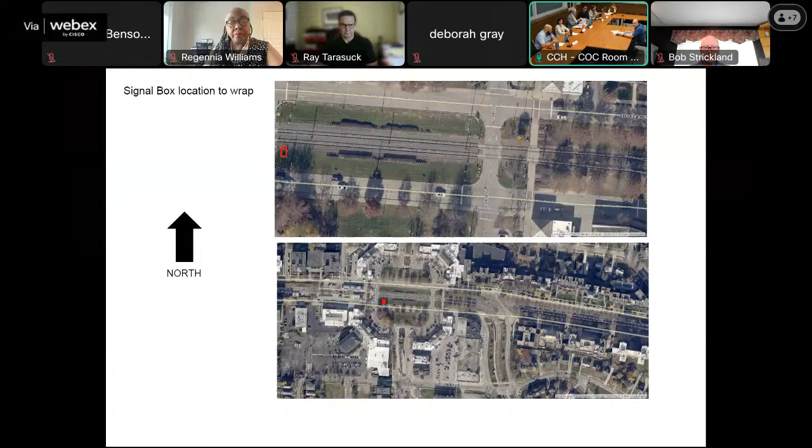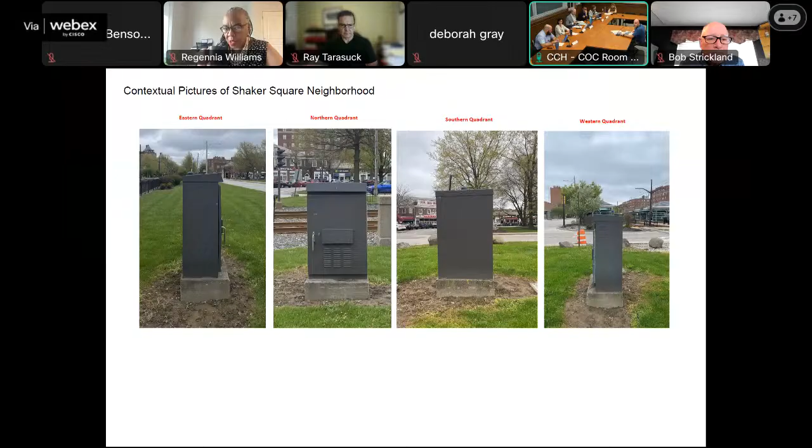And how it currently looks and the design that is being proposed. This is called A Night at the Fair by Renee Parker Boyle.

This project was reviewed by the Greater Cuyahoga Valley Historic Design Review Advisory Committee on July 1st. The committee was excited to see another wrapped signal box. They've seen a few so far, and they were supportive of the project and recommended approval.

Our staff recommendation report is essentially just going to be an email from the Public Art Coordinator, Tara Petrus, who was unable to join us this morning. She says, with vinyl wrapping being an effective graffiti deterrent for utility boxes, I support this project as a low impact way to add some additional visual interest to the existing infrastructure at Shaker Square, complementing the existing box they wrapped on another quadrant last year. With the box being owned by the city, we did get written permission from Commissioner Mavick on June 25th to wrap this box. It was approved by the Greater Cuyahoga Valley Historic Design Review Advisory Committee on July 1st.

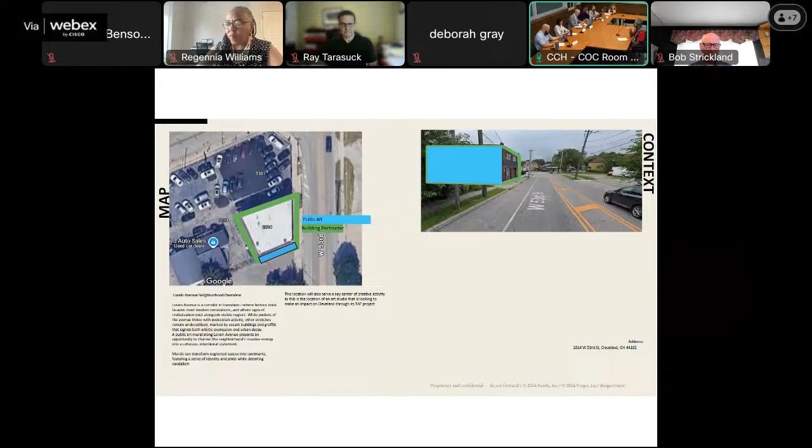Let's move forward. The building is a nondescript warehouse on Lorain and 53rd Street and has no architectural details of note, but does have, through the years of repair, an interesting graphic detail through the black striping and black doors, black windows. And the mural that we're proposing takes that into account, extending that black detail and doing a flat black background onto the side of the building with the crystal dove being the reflective element that contrasts heavily from the flat background.

And the imagery we were representing, we did a crystal heart and what happens when that breaks out of its cage and becomes the dove. So it's really a cool way of showing that freedom starts at the heart. And it went through the historic review, and we're just here to make sure that it's all good. I don't know, there's much more to say.

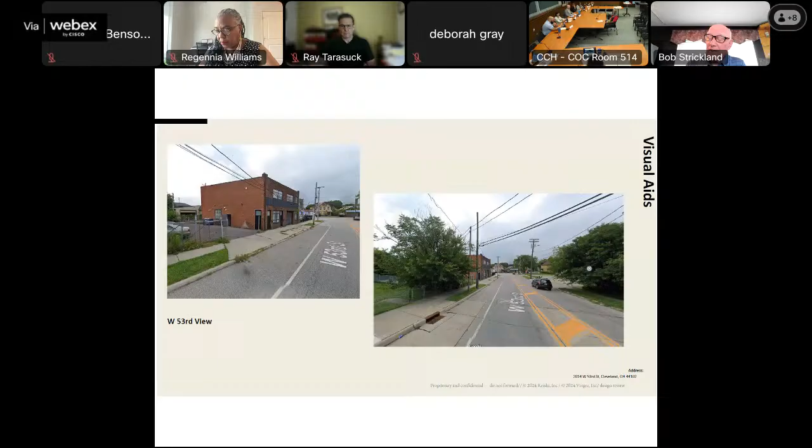Mr. Strickland? Thank you, Madam Chair. I think what my comment was going to be is that typically we do ask that kind of a masonry frame be retained around the mural. But in this particular case, bringing the dark background, the black background, all the way to the corners and up to the coping is very appropriate and unusual. There's no significant major masonry features on this building, so I think bringing it all the way to the corners and to the coping is most appropriate, and I can't wait to see it go up.

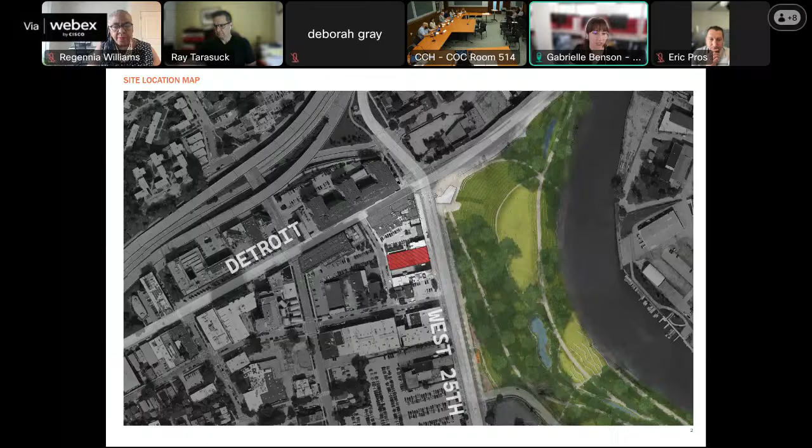We'll be reviewing the Flannery Georgalis offices in Ohio City. Next slide please. We'll go through these slides rather quickly just to jog everyone's memory. So we have the site here on West 25th Street and West 26th.

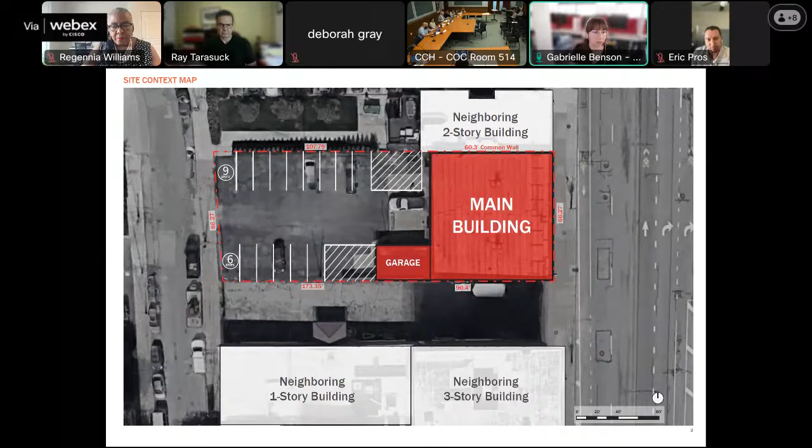The main building is next to a neighboring two-story building and has some parking in the back. The client is expecting a lot of their clients to be approaching from that parking area. Here are some existing conditions that we further investigated after comments from last week. Next slide please. And a historic image just to remind everyone what it looked like in the past.

Next slide please. So here we get into some of the updates that we have made since the last meeting we attended. There was a comment about the treatment of the masonry on the south facade of the building.

Instead of a painted finish, we are simply leaving the masonry, or rather we are repairing the masonry. As you can see in the existing facade, there's some damage to the masonry, especially towards the front of the building, and some parging towards the back. We're planning on repairing the masonry that needs to be repaired and then covering that with a layer of parging that matches the existing stone details on the facade.

Next slide please. So here we have an updated elevation with some of the changes we were able to make since the last meeting, and we'll get into those details right now.

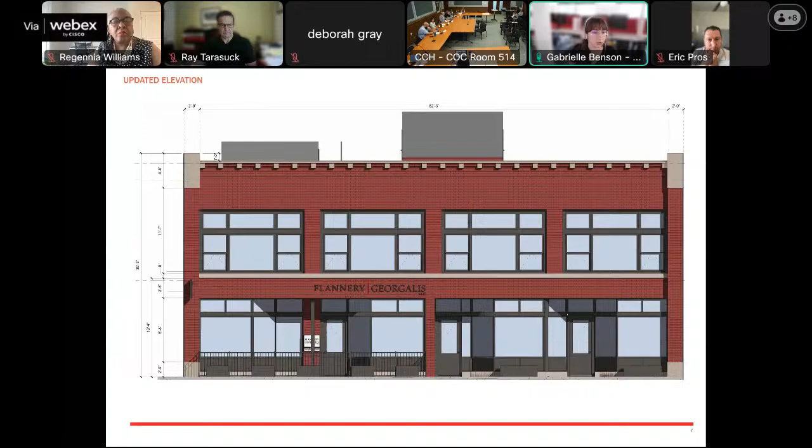Next slide please. Just to review signage, after our last meeting we have a similar sign towards the southern half of the front facade, a simple blade signage. After our discussions and comments about confusion that might occur from the gated area around the front of the building, we added signage that directs people to the other entrance around the back of the building. We also included a bit more signage for the front of the building itself.

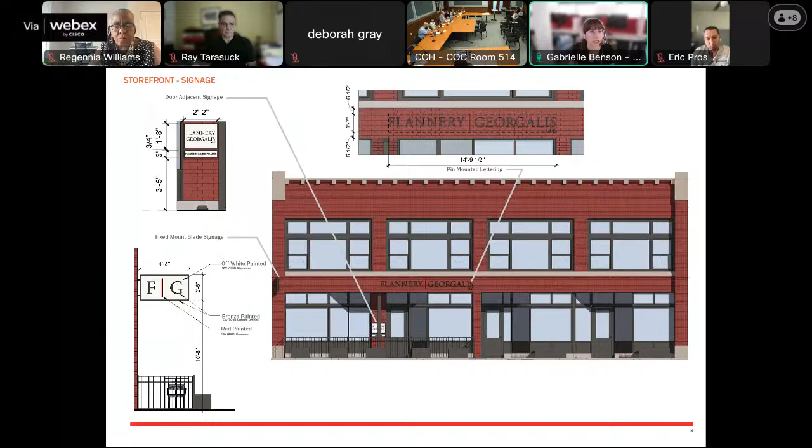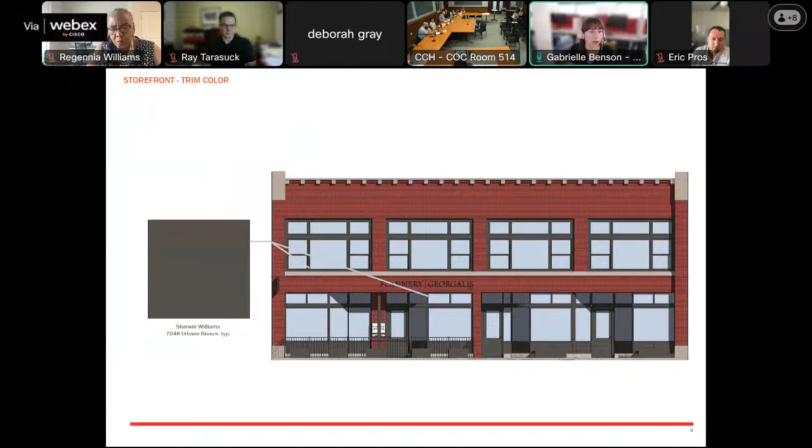Next slide please. In response to comments that the color of the facade was a bit dark, we adjusted that to make the color a little bit lighter. Instead of a dark black color, we're using more of a gray bronze color that's slightly lighter, that still matches what the client was hoping for visually, but lightens it up a bit. Next slide please.

In response to the windows and window treatment concerns, after further investigation we realized there can indeed be transom windows behind or above the main glazing of the storefront. We were able to adjust the knee wall to be a few inches lower, and shift the transom windows a bit higher, so there's more room in that main glazing area.

This gives a bit more context for that storefront condition, where the soffit bumps out. The bottom of that is actually where the storefront will start, whereas previously it was believed to be below where we were planning the storefront to begin. That gives us plenty of room for the transom window, so there shouldn't be any issues there.

After analyzing our space and egress patterns, especially the main stairwell from the second floor with egress right north of the gated area presented last meeting, we decided the gated area was the best spot given the combination of factors that led to its position in the first place. You can see that gathering space connects from the inside to the outside, so we believe this is the best spot for it.

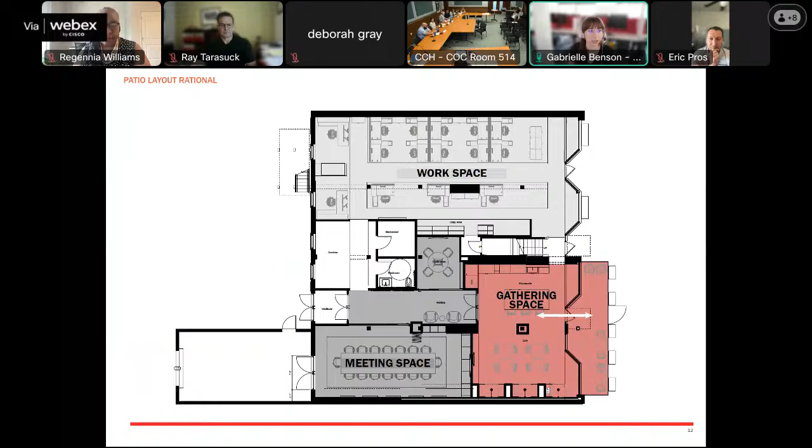We would love to hear your comments and get any feedback. Thank you so much for the presentation.

It didn't go back to local, correct? Correct. All right, then we will hear landmark staff recommendation.

This was tabled at our last meeting, as you probably remember. The next day I had a meeting with DS Architecture. They provided their Part 2 from the State Historic Preservation Office, so we went over that and reviewed everything. Gabrielle did a good job summarizing our discussion. We talked through a lot of points and went into more detail about some of the concerns raised and how those might be resolved. I feel like everything raised last time has been fairly well resolved.

The thing I had the most questions on was the color of that south wall. They're proposing a stone color for the parging, which I think works. It's one of those tricky things—you don't want to paint it red like brick, but you want it to disappear, so do you go light or dark? I don't know if the commission has thoughts on that, but I think the solution they've come up with is a good one, and I would recommend approval.

Thank you for that summary of your recommendation. We'll now open up the floor to the commission for questions and comments.

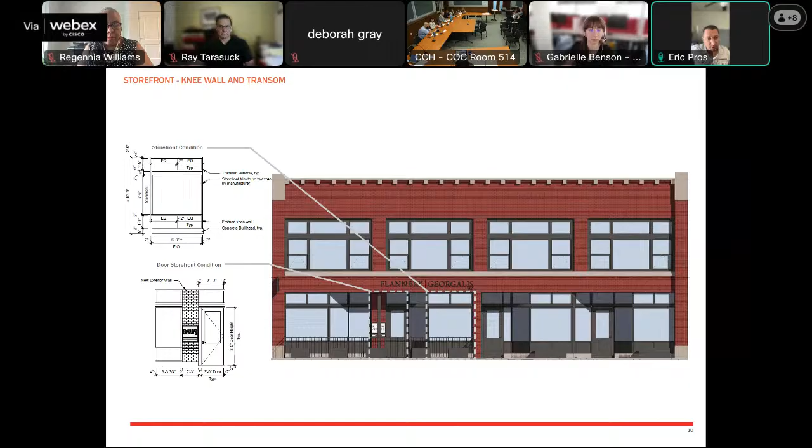Sure. I don't know if you can zoom in and see it on this view. There are some details there, but essentially there'll be some - even the historic photo might be a good reference as well - but there'll be some panel insets. It's not going to be a flat surface, maybe the way that drawing is reading, but there'll be a bit of depth, kind of like on the far left there. You can see a little bit of the depth it has. Our intention is not to recreate, but to pay tribute to that concept of a little bit of depth to that surface, if that helps.

Looks good, thank you. Thank you, Ms. Anderson. Other questions and comments from the commission?

I guess the one comment I didn't make previously was on the color of the parging. I am with staff - I think that's a tricky color because you don't want it to feel stark, but it wants to blend well with the stone. So I would recommend the final color come back to staff just to see how it appears, if your intentions are to match the stone, to make sure we're all comfortable with it matching. If it has that tanner color, since there isn't actually a color listed to match the existing stone, I'm comfortable with that - not the stark white gray - would be my preference.

That's what I thought as well. Yeah, as you said, it's tricky. We don't want to create a false sense of history or paint it red, because red would never match the brick, first of all, so it would bring more attention to the fact that it's not brick. So our goal there is really, it's not so much about matching the stone to make it look like stone, but finding a color that's harmonious with the rest of the materials, so it feels cohesive and is not the first thing you look at, ideally. Hopefully there are other beautiful details on the building attracting your attention, and perhaps someday we'll be coming back to you with a mural idea too. So we're kind of trying to leave it as a blank canvas for now, and hopefully it falls into the background.

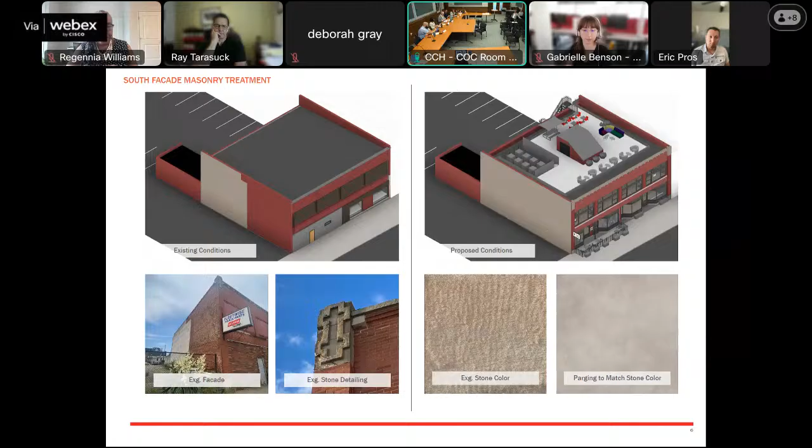Excellent. Congratulations. We look forward to seeing your project move forward. Thank you very much. Thank you very much.

Before we move into the next applicant, that's for tabling, we need to untable this case. Can we have a motion to untable?

Madam Chair, I'll make a motion to untable. Thank you, Mr. Lozier. We have a motion. Do you have a second? Second. Thank you, Mr. Sandberry. Mr. Musson, please call roll.

Ms. Anderson, yes. Councilmember Gray, yes. Mr. Lozier, yes. Director Mersman, yes. Mr. Stanberry, yes. Mr. Strickland, yes. Mr. Tarasuck, yes. Dr. Williams, yes. And Ms. Trott, yes. Madam Chair, the motion passes unanimously.

Excellent. All right, I'd like to welcome the applicants to announce yourself and tell us about your project. Good morning, this is Robert Hoge. We're talking about a siding application at 2634 Haddam.

As a refresher, in the last meeting I had requested to table it in the interest of getting feedback from Rhonda Curtis, the owner of the property, and our desire to show great respect to the Landmarks Commission. We have resubmitted this as the same, with some additional photographs.

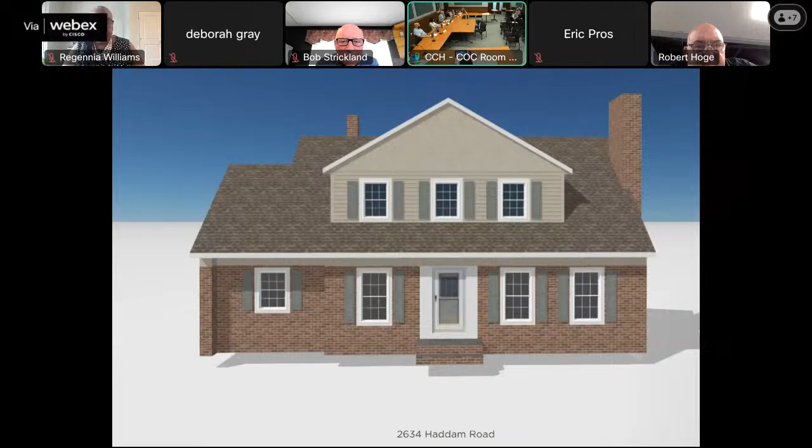Ms. Anderson? Thank you, Madam Chair. I'm in agreement with Mr. Strickland. I think the vinyl on the sides and rear are fine. This isn't a real large area. I don't think it'd be a huge hardship to maintain it by painting. It's not a real tall house, so people don't have to pull out super long ladders. So I think the front elevation should retain the wood, matching the sandalwood color. I think that color's very appropriate. So those are my comments. Thank you.

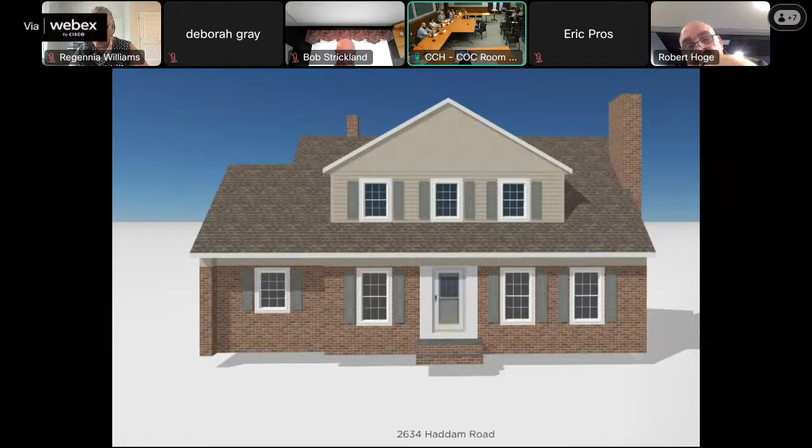All right, thank you, Ms. Anderson. Any additional questions and comments, Mr. Lozier? Thank you, Madam Chair. I'm in agreement with my colleagues. I think repainting the front facade, scraping, repainting it as is, would certainly be preferred. I'm also in agreement that the sides and rear could go to the 5-inch vinyl siding. A question: would the intent be to remove the existing wood siding and replace with vinyl, or apply the vinyl siding on top of the existing wood siding? We would apply it to the existing, first with insulation and then second, the actual siding. But the existing, to answer your question, the existing stays.

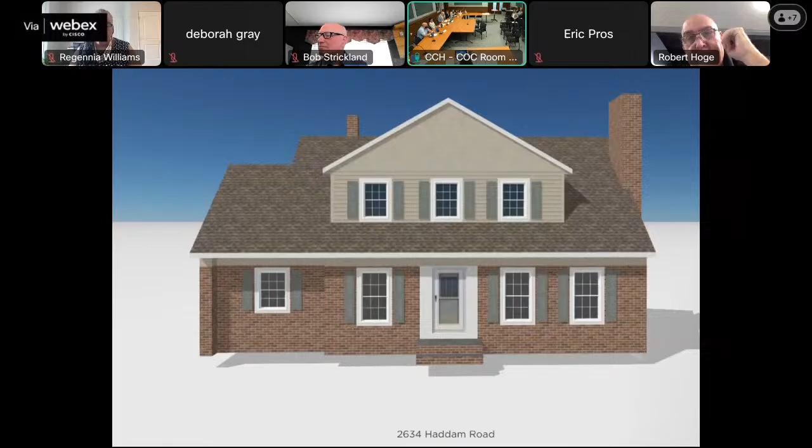Thank you. All right, thank you, Mr. Lozier. Mr. Stanberry? Thank you, Madam Chair. I am not in support of this whatsoever. I don't think there's a reason to cover this with vinyl. There's no leaks, there's peeling paint, which can be scraped and painted. It's relatively easy maintenance. Vinyl applied over this is not maintainable. You can't repaint that. You would have to take it off and put up new vinyl if you were to make any changes. And this is the historic material, the original material. I am not in support of any vinyl on this building. I would recommend scraping, painting, and maintaining. I think they've done a great job up until now, so I would prefer that they continue to do that.

Thank you, Mr. Stanberry. Hearing fairly consistent feedback, would someone like to make a motion? Mr. Lozier? Madam Chair, I've got a question if I could, excuse me for interrupting. Yes, go ahead, Mr. Hoge. Yeah, this is Robert Hoge.

One of the thoughts was, one of the indications at the last meeting was to consider a 7-inch siding, consider removing the shake, which the concern was that it was not in character. To remove that shake and apply a 7-inch vinyl siding, larger than the 5-inch as submitted, as a compromise. Rhonda Curtis would be willing to go to a 7-inch. It costs her $1,800 more, but out of respect and wanting to be a good neighbor, she would go to the 7-inch. She's indicated painting, in her opinion, is not the next move, and would rather compromise with a larger clapboard 7-inch and likewise remove the shake on the gable. I just wanted to offer that for discussion, if that helps gain approval.

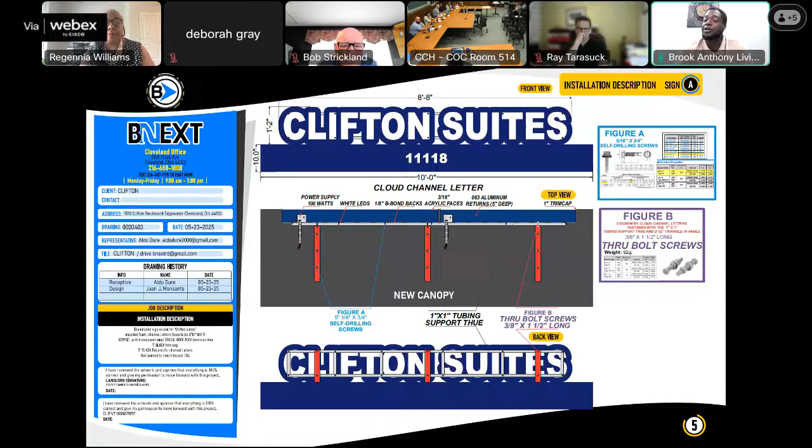All right, thank you. Then we'll move on to Design Review Advisory Committee recommendations. Thank you, Madam Chair. This project was reviewed by the Historic West Cleveland Design Review Advisory Committee on July 2nd.

At that time, the applicant or representative from BNEXT Sign stated they were not the company responsible for installing it, since the signage and awnings are already installed. And so we did request the actual contractor that installed it, or the owner, to be present. There was a lot of discussion on the material of the awnings.

It's a vinyl material, shiny plastic, which a fabric or a less shiny material would be more appropriate. The arched openings and the details there are covered by this installed signage, and the white color, which has been there for a few years, doesn't really fit the building, and the lighting that's proposed, the downlighting on that awning that was installed, they didn't find appropriate.

They went over how a round awning may be more appropriate, in canvas, and that they understand there's a need for a refresh, but possibly a darker color entry would be better, to blend a canvas material with stripes or another kind of material or color. So they're not opposed to seeing a refresh on this building, but want it to be more appropriate.

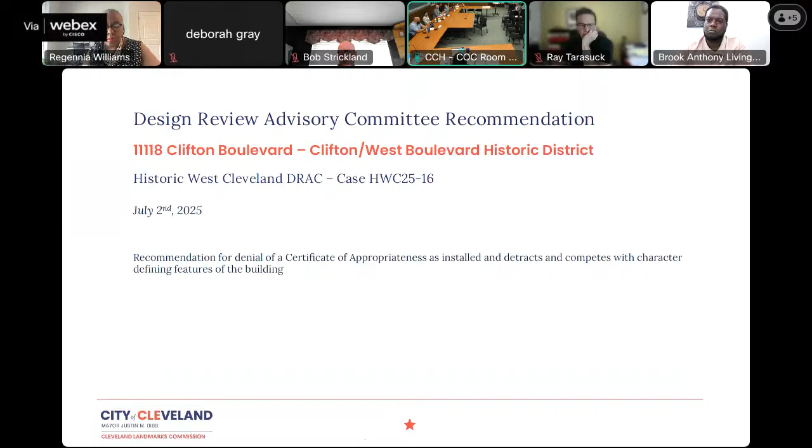All right, thank you. Then we'll move on to Landmark staff recommendation. Thank you, Madam Chair.

Staff would agree with everything that came out of the local design review advisory committee. We understand the desire to refresh the image of a building when there's new ownership, or just that people like to make things look a little different sometimes. But it's always an easier discussion when the work hasn't been done already.

The biggest point for staff is: are you asking for approval of the signage and awnings as installed, or the signage and canopy as shown in your renderings? Because they're two very different signs. The address is a totally different size. They're just very different proposals.

Generally, the vinyl awnings applied over that old shake pent roof were added at some point, maybe the 1970s. At some point they changed the storefronts on the first level, then had a shake pent roof, and then added fabric awnings over it in subsequent years, and that's how it's been handled for the last 40 years, or at least 20. We understand wanting to cover up the shake, but the vinyl doesn't feel like an appropriate material, and we'd agree that going to a rounded awning over the entrance with poles at the end is a much more appropriate way to handle the entrance.

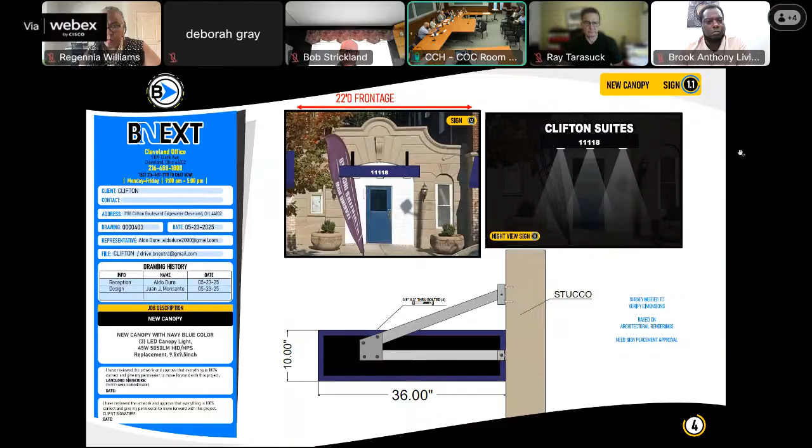Is this internally illuminated? Is that still what they're proposing? Yes, it is. Okay.

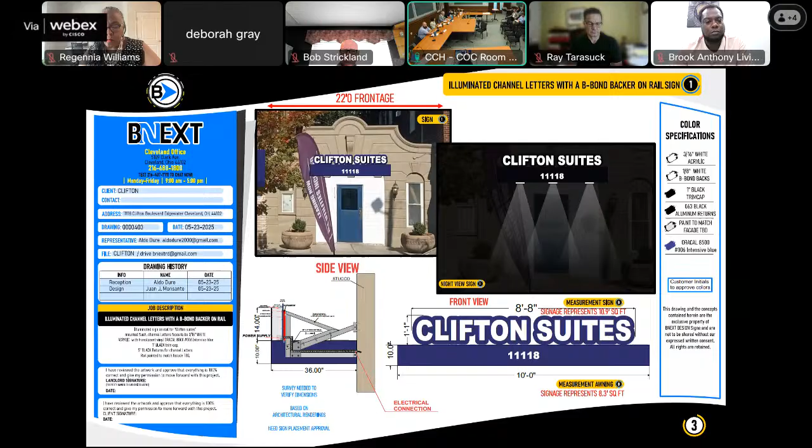I'll start us off since maybe I'm more familiar with the location. I am in support, as staff said, of doing a refresh of the building. I think this building is a gem and it has gotten a little tattered, so I appreciate the new owner wanting to invest in it. I do agree with the comments of staff that the current proposal doesn't mesh well with the current architecture of the building - it's a very modern approach placed in front of a very classical elevation.

I also don't support the internally illuminated lettering because, as my fellow commission member said, this is a residential building. It's for identification, but it's making it feel like a commercial building. The lighting itself, I do appreciate and don't object to - I think it's great to bring lighting to the area.

So a proposal that would work better with the architecture of the building, having an arch shape versus the straight shape that's been placed in front of the arch, would be my preference and recommendation. It could be done through metal or fabric, and could have signage associated with it, but I am not in support of the current proposal. That's probably the best way to say it.

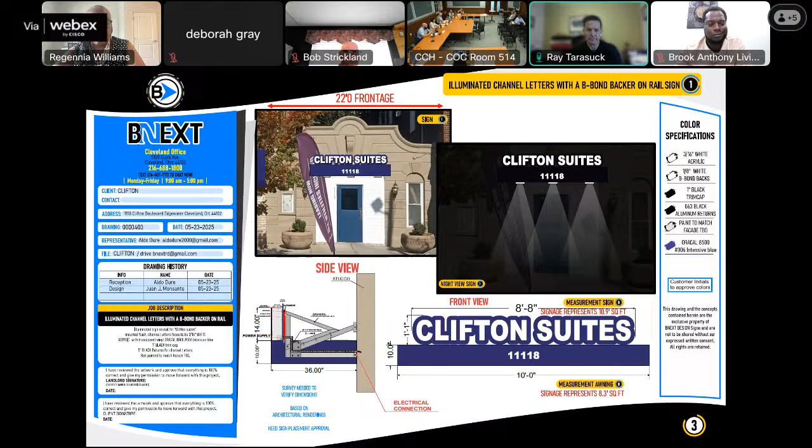Mr. Musson, please call roll. Ms. Anderson, yes. Councilmember Gray, yes. Mr. Lozier, yes. Director Merschman, yes. Mr. Stanberry, yes. Mr. Strickland, yes. Mr. Tarasuck, yes. Dr. Williams, yes. And Ms. Trott, yes. Madam Chair, the motion passes unanimously.

Staff will follow up with the applicant offline. All right, well, thank you. Then you'll be hearing from staff offline. And then we look forward to seeing you back here in the future. Thank you very much, Board. You guys have been great today. I do mean that. Thank you. All right, thank you. We appreciate a kind review.

We'll move on to our next applicant, the Marion Seltzer School located 1468 West 98th Street. New construction.

Good morning, Madam Chair and Commission members. I'm Jeff Henderson with TDA Architecture, and with me is Holly Delasanti. Delasanti with the Cleveland Schools. So we're here to present the final design for Marion Seltzer.

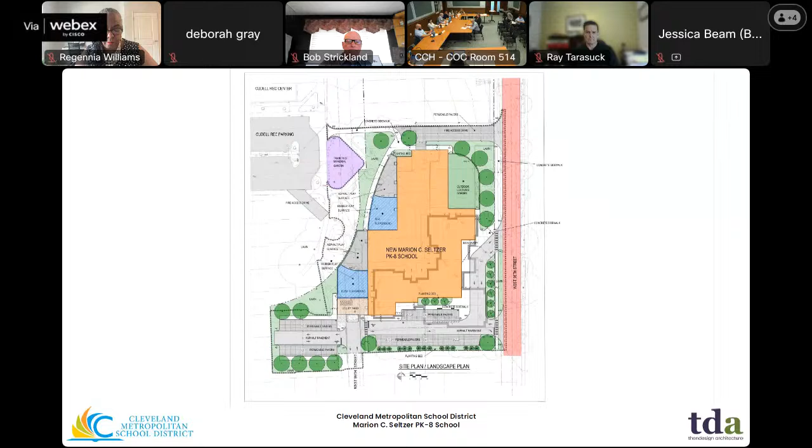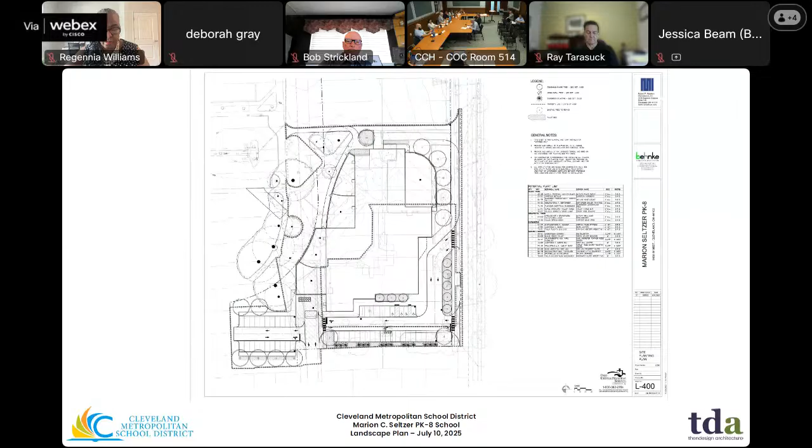Next slide is our tree preservation plan. I met with Jennifer Kipp yesterday after she had a chance to review it, and she was okay with it. We're taking out, I think, 33 trees in that whole area, and we went through all those with her in terms of why certain ones needed to come out - obviously, you have to build a building, so some of them have to come out. We're installing 39, so her gauge was that we have to install new material equal to or greater than what we're taking out, so we're above that and she was fine with that.

We do still have to get a permit - we have to go through urban forestry to get a permit to actually take down the trees, and we have to put protection around the ones that we need to protect, and they need to approve that. So that's all something that's in process, but she has signed off on this plan, so that's a good thing.

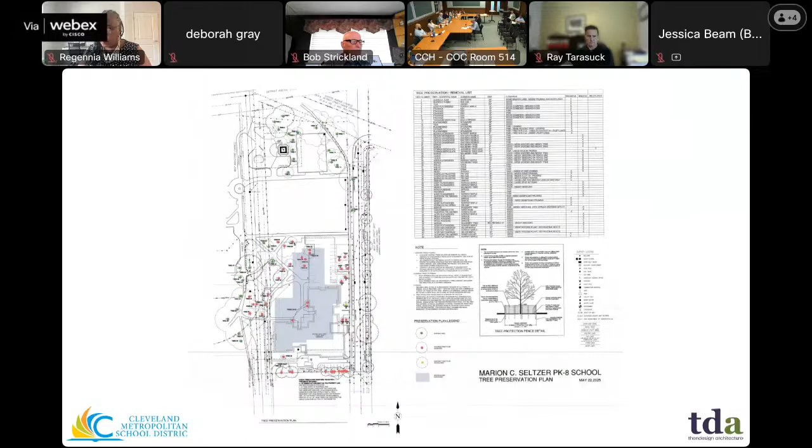The next slide is the photometric.

So it kind of shows the locations. The red are the poles that we are proposing, and then we have the wall packs that are around the building, and the light levels that are around there and at the property lines. Kind of a technical thing that we have to do, but that's that.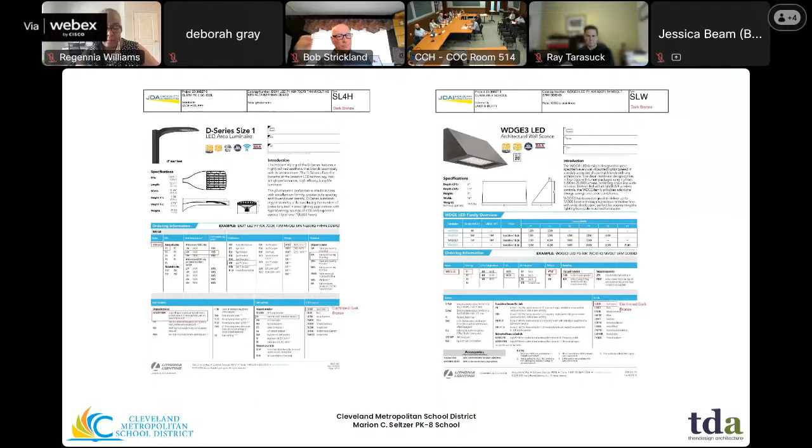So the next slide is our materials. These are essentially the same things we presented previously. The whole idea here was the school in the park, so from all our sessions last summer with staff and community, they wanted a more natural feel to the school. That's what generated some of the neutral colors for the masonry. There are 2 colors, plus the block that's on the gym.

The wood grain metal panel, which we talked about—we couldn't use real wood, we wish we could, so this is a substitute for that, but kind of the same idea. It's a 12-inch wide panel that we're using both horizontally in certain locations and then vertically, and I'll talk about that a little bit.

The blue accent panel is at the front entry, which you'll see in some drawings. That didn't really change from the previous one. We also have sunshades over the classroom windows that are also blue, and four colors of glazed brick that we're using in the panels.

Some of the conversation early on was like, can we do something temporary, something that can be changed out? I'm still convinced this is the right way to do this, that we want it permanent. We don't want a situation where something gets changed out once and then fades or something else happens. We wanted something more permanent to kind of mark the moment in a permanent way.

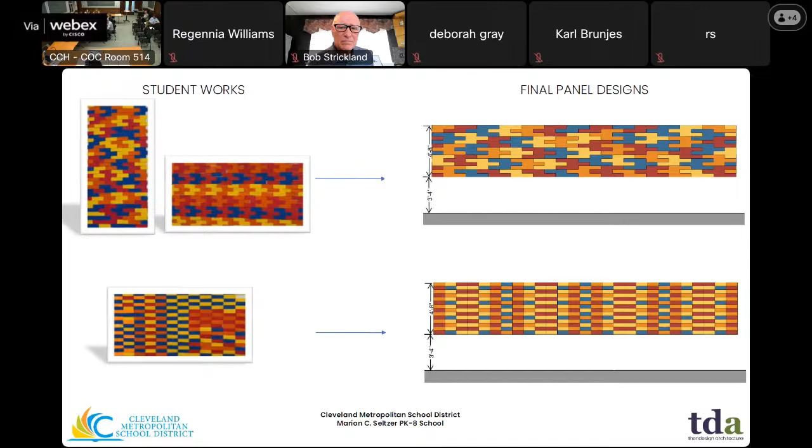Then the second to last one, this was a clock tower, so the clock tower is actually a stairway. We used kind of a stairway pattern, interpreted again I guess, but a stairway kind of pattern that would be on the end of the building that would face the clock tower. I thought that was a pretty interesting way to go.

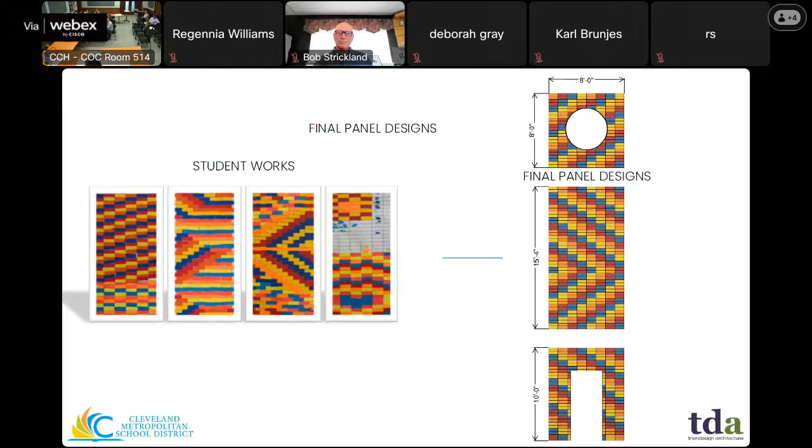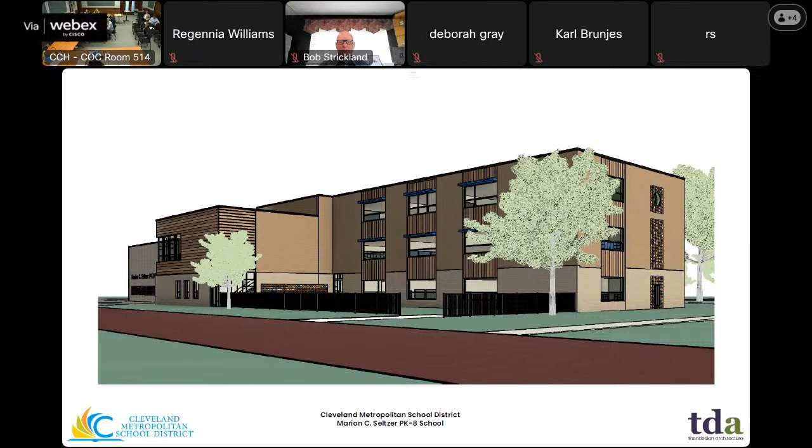And then the next one is a little more, I think it's in the playground. I think the fence has been taken away, but you can see the two actually on that one wall. And I think there's one more that shows the one on the elementary playground, the last slide.

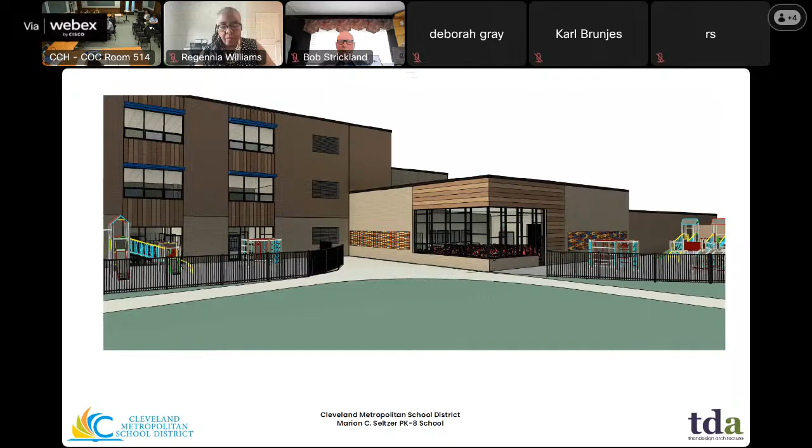So that's my presentation. I'm open to any questions or comments.

Thank you for the presentation. Okay. Thank you for the presentation and your patience during getting us back online.

Before we get to our questions and comments, we would like to review the Design Review Committee recommendations. This project was reviewed by the Historic West Cleveland Design Review Advisory Committee on July 2nd. They discussed final details they'd like to see, like final landscaping, site lighting was presented and submitted. They talked a lot about the glazing and the colors and how they should complement each other, and discussed the permeable pavers and the hard and soft surfaces around the buildings, which are surrounded mostly by hard surfaces, so bringing more of those lawns and grassy areas closer to the school. It's surrounded by a park, but still the school grounds. Overall they recommended the issuance of a certificate of appropriateness with conditions for the final details to be submitted, and for the site plan to better document the hard and soft surfaces for the site.

All right, thank you. Then we'll move on to public comment.

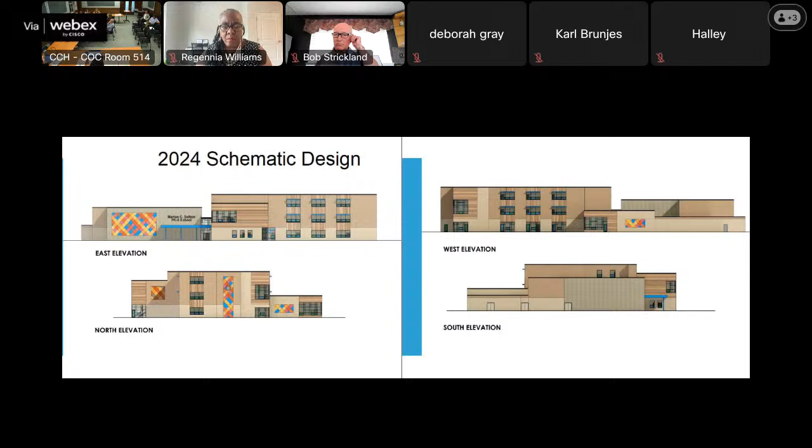But I think generally we appreciate the effort. This has certainly come a long way. Look forward to the discussion from the commission. Thank you. All right, thank you. Then we'll open up the floor to the commission for questions and comments. Who'd like to start us off?

Director Murphy: Thank you for the presentation and your work on this site. I know it's been a journey and really appreciate the listening that you've done. I think the highlighting of the student artwork in the building is a really nice testament to both the community in the building and the cultural community surrounding the building. So I'm really excited to see this built. This is a site with a lot happening, with the Tamir Rice Memorial Garden, the rec center, Cudell Park, and the new school here. It will really become a gem for the community, and I'd love to see CMSD being a part of that. I appreciate the bike racks in the rendering as well.

Thank you, Director. Other questions and comments from the commission? Anderson: Thank you, Madam Chair. Appreciate all the thought and effort that has gone into this design. I really like the introduction of the color elements referencing the artwork and cultural heritage of the many different ethnic backgrounds of the students.

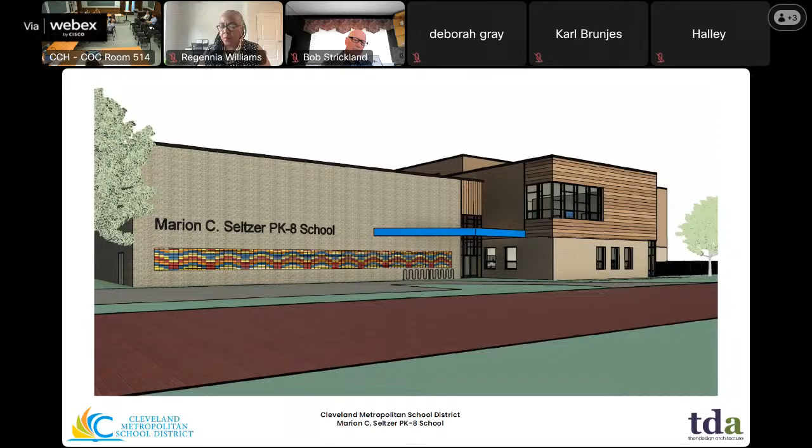It looks to me, at least in the patterns of the brick, that you're using more naturalistic colors, because I think a lot of the references, like the rugs and weavings, were based on organic dyes. I appreciate that. I'd prefer to see, rather than fire engine red, more of a saffron red in those elements. I feel like those more naturalistic colors should be carried over into some of the other color elements as well. I drove by Gallagher, which has been recently renovated, and I liked the introduction of color, but I found the colors were too, I hate to say it, Pee-wee Playhouse, as opposed to something more pleasing to the eye, especially on that scale.

Can I make one comment? Oh, go ahead, I'm sorry. No, Anderson, by all means, go ahead.

I absolutely agree that the colors our fabrics get from plant materials are not the intense primary colors. That was always the intent, to not use the real primary colors, but I'm also limited by what I can get from a glazed brick. So the red is not red, it's a cranberry, a darker red. I tried to peel back as much of the chroma as I could to get them more muted, more naturalistic. I think that was always the intent, trying to do that. Yeah, that's the one thing I'd like to see carried over into some of the other elements.

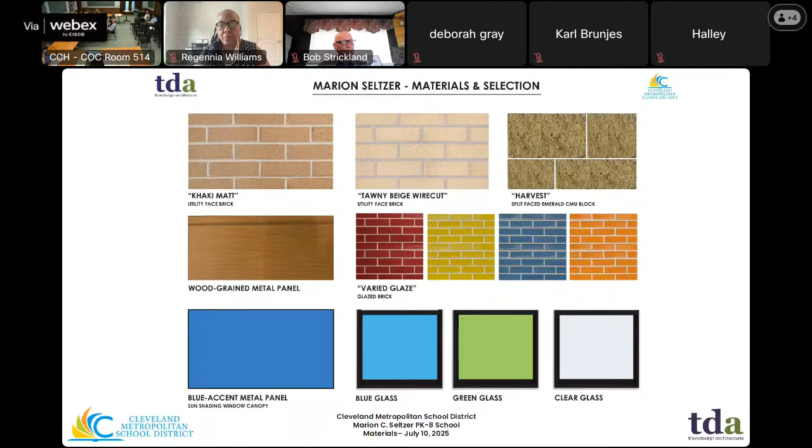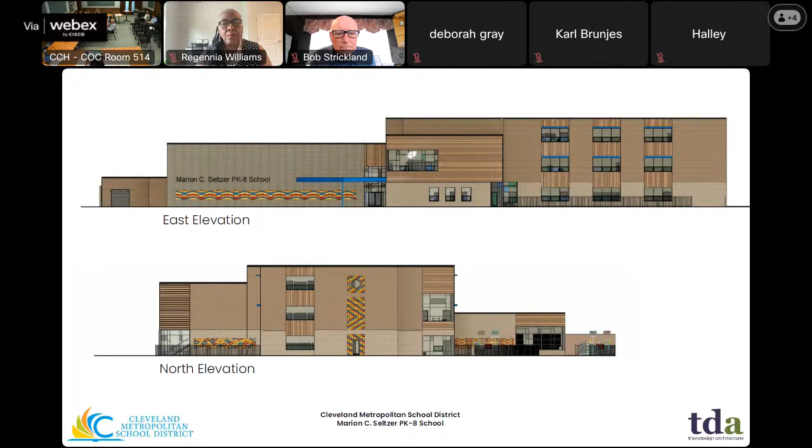And then my only comment would align with what staff said, is the stair tower. That one's just not quite connecting with me personally yet because of the 3 segments of it. Your previous one feels more like a mural. So that's the only one that I'm not 100% sold with, because there's 3 different pieces. It's not resonating with me yet.

I think it's a triptych. Should it be one element in the front, in the lower portion, and then one in the upper portion, so that at least it felt like you have 2 different expressions there?

That's the only one that I'm not 100% sold on right now. I understand what you're saying. One of the things we're trying to do is, the tower is a very neoclassical thing, right? So it's got a base, middle, top. And I think, as simplistic as that is, that was the idea of splitting this into 3 parts, so that it had a base, a middle, and a top. And to that level, that was the thought.

Which I appreciate, but it's not a tower, it's a flat application on a wall. So I think if there was an expression of that, with an architectural expression in addition to just the color expression, then that would be more successful. Or if it is just a flat application, let it be something a little bit more unified with the rest of the architecture. But that's my personal opinion.

I appreciate that you're giving that expression to the north, towards the north, so that the community on Detroit can actually see all of these, because everything else is fairly discreet. So I guess I'm more in favor if you put it in the upper portion of your brick, like maybe larger as one. But it's nothing I object to, it's just my personal opinion.

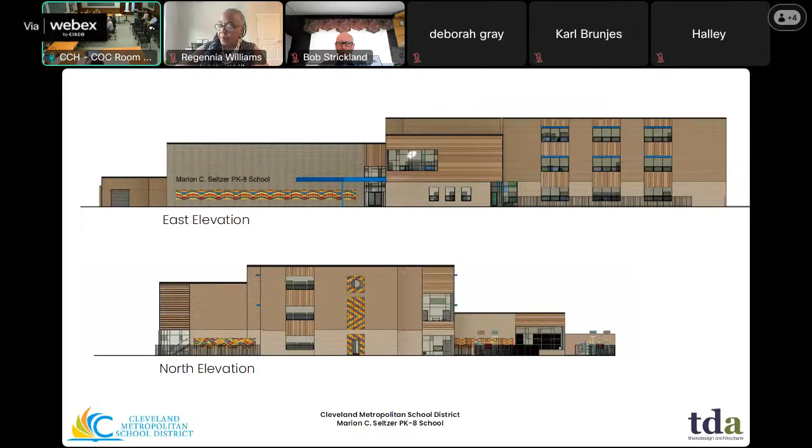As I explained, this is a process that the staff wants to work through. So I imagine it could be brick material in there. I guess there's going to be beds or raised beds, so it's seating -- there's probably going to be seating. We usually allow for a class to come out there, so there might be seating large enough to seat a class. So it's a multifunctional thing, probably a combination of both, but I couldn't tell you what the plan is at this moment.

Sure. I would just say that the final plan should be submitted to staff for approval, if, when that is decided at construction. If it evolves after construction, we just need to know what it's going to be. Probably a year or so out from construction, what we will probably do as a conclusion to the building before that is we'll probably plant grass in there. And I think that's what, grass for permit, is what we need to know. And then if it evolves, that's what we'll show.

And any improvements then will happen to that. Perfect. So, yeah, is that right? Okay, perfect. All right.

Mr. Lozier, sorry, I do have one more clarification question. This may be in response to the public comment, but these different play areas are fenced off, but they do have gates. Is the intent that this is only for use by students at school, or is this also for community use as well?

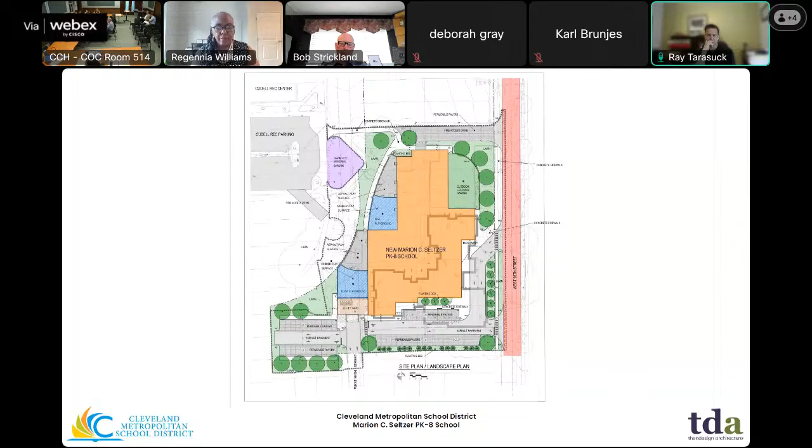Ms. Anderson, yes. Councilmember Gray, yes. Mr. Lozier, yes. Director Mearsman, yes. Mr. Sandbury, yes. Mr. Strickland, yes. Mr. Tarasuck, yes. Dr. Williams, yes. And Ms. Trout, yes. Madam Chair, the motion passes unanimously.

All right, congratulations, we very much look forward to seeing your project move forward. Appreciate it. Yes, we are too. It's been a process. It's good, it's a good process.

That concludes our certificates of appropriateness. We'll then move on to our schematic design.

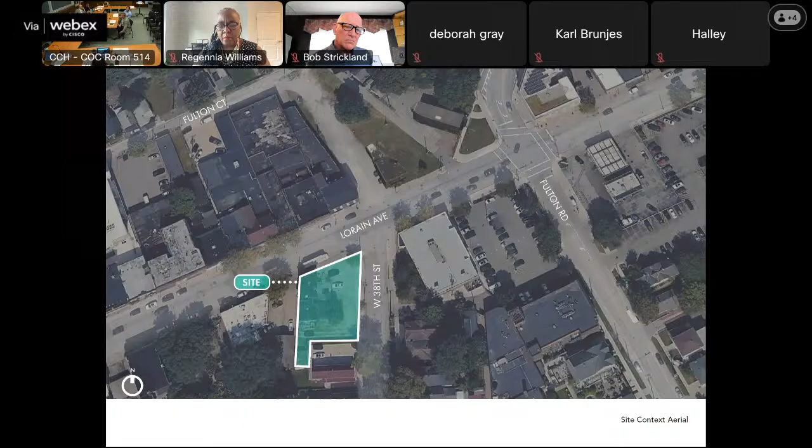Here we have the existing condition of the Lorain Avenue facing portion of the project. At right is the 3813 and 3815 building. You can see it's a rather handsome structure that has had some manipulations done from its original state as kind of a typical early 20th century storefront building, so you have the constantly shrinking glass area. And then to our east, which is to the left, you can kind of see it here at the base of the two-story building, what was the service station of an old gas station.

To bounce off that, we've taken care of the environmental remediation on this site. It's about $100,000 worth of work that we've put in to remediate the gas station site, so just want to be clear on that. Moving the tanks - yeah, we had to close 3 in place and remove 1. We got no further action from BUSTR, so we're well on our way there.

So obviously this site has been vacant for a very long time. Work is currently being done there again to remediate the gas station use. The existing two-story building is of course a mix of brick, stone, and wood cladding on the bay windows, and then a nice detail of the kind of Spanish style roofing above those bay windows.

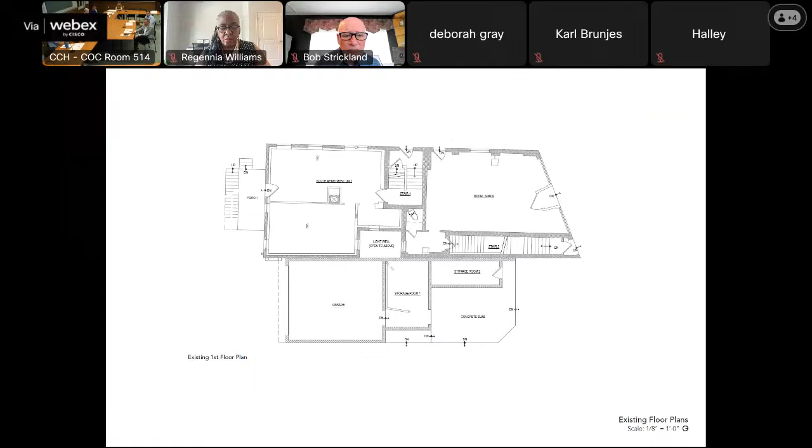Here we have the Lorain Avenue facing facades of the existing conditions currently at the top, and then the new elevation at the bottom. You can see we'd be opening up that storefront to the maximum amount possible structurally, with large areas of glazing at eye level, and then transom above.

And then to the east, we have the one-story addition, which would be clad in a thermally treated wood. I do have a sample of it if you'd like to look below. It's really more of a, I'd say, both thermally treated finish—it's a product as opposed to simply ordering standard material. Smells good too.

As opposed to using just, let's say, nickel gap lap siding, this is a product that is becoming a lot more available in the United States. It comes in a lot of different finishes, but it resists decay and fading of the finish relative to typical cypress, cedar, or pine.

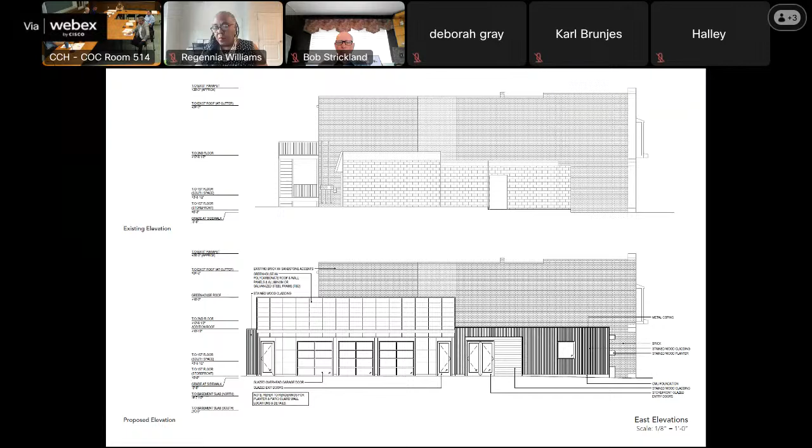Here are the rear elevations. You can see at the bottom we have the exit stairway, one-story addition, and then the greenhouse, which would have a 6-foot fence basically along the southern end to block views into and out of the greenhouse relative to the residential context to the south.

We've since learned that there is a new owner of the home directly to the south of us, and we really plan on talking to them about acoustic management and things like that. We do want to be sensitive to the neighborhood.

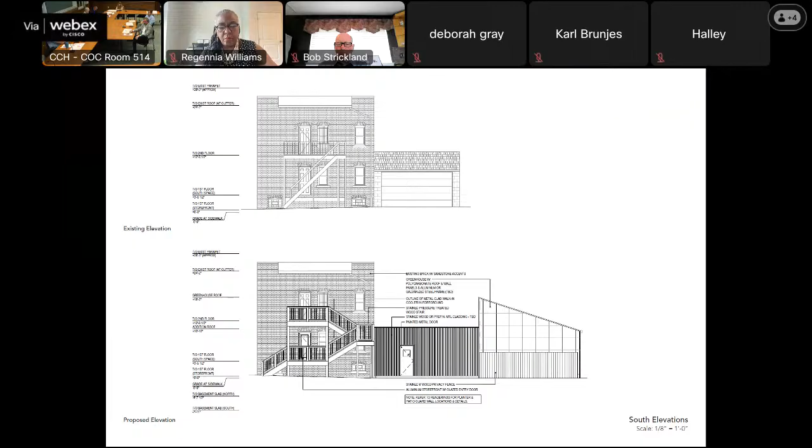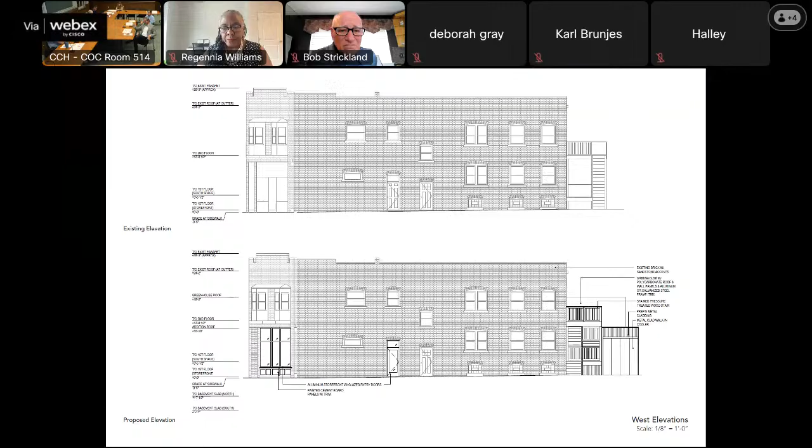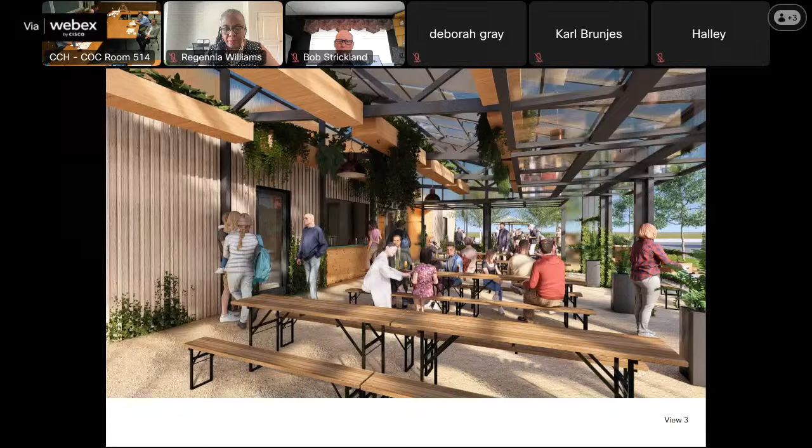Here's a view in the greenhouse looking towards the north. You can see the relationship to the existing Noble Beast space, and I think there's even more opportunity in this case to really kind of accentuate that.

Here's a view looking towards the south within the greenhouse. You kind of see beyond the polycarbonate cladding of the greenhouse, the proposed 6-foot fence to block views into and out of the space.

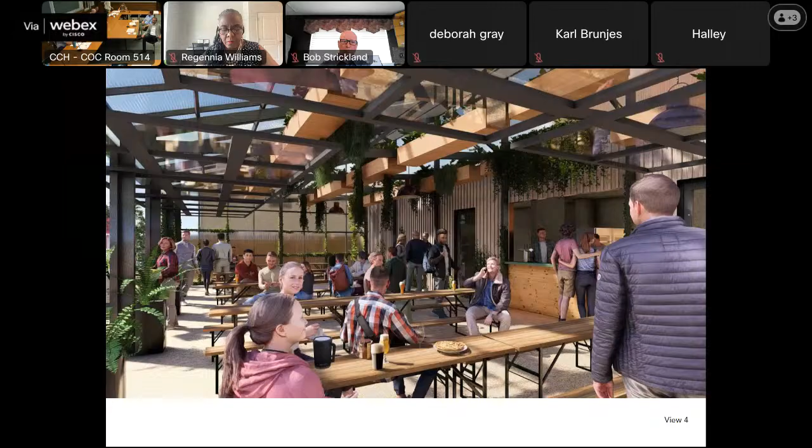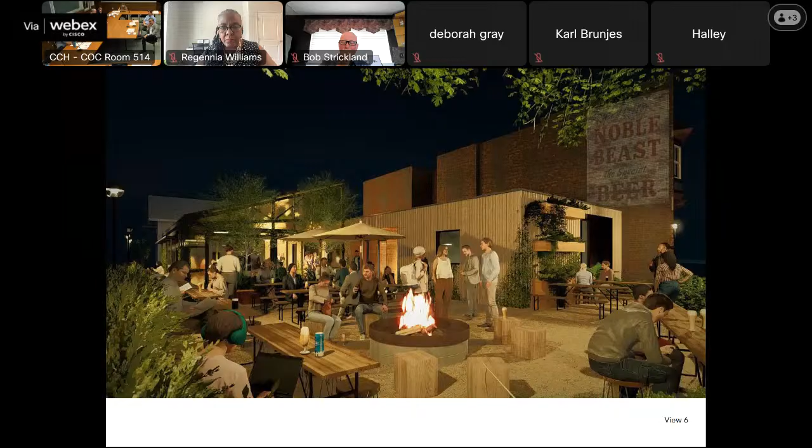Here's a view within the beer garden, looking towards the greenhouse, the one-story addition, and the eastern facade of the existing structure. Again, you can see the vegetation kind of spilling out of these boxes that are integrated into the architecture, to really make this feel lived in and like it's been there for a fair amount of time.

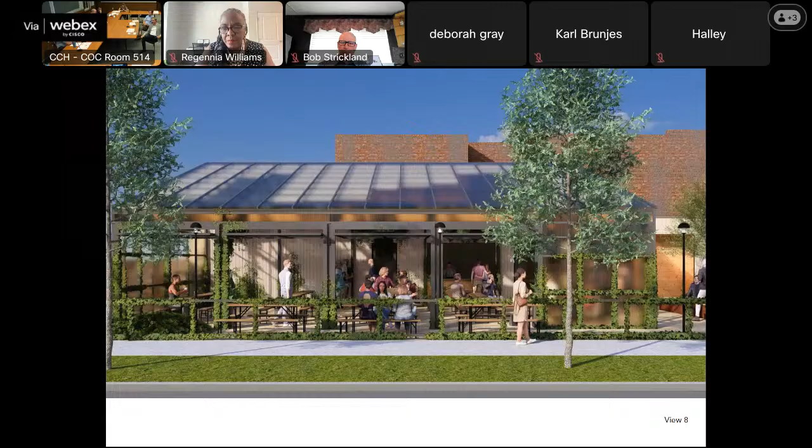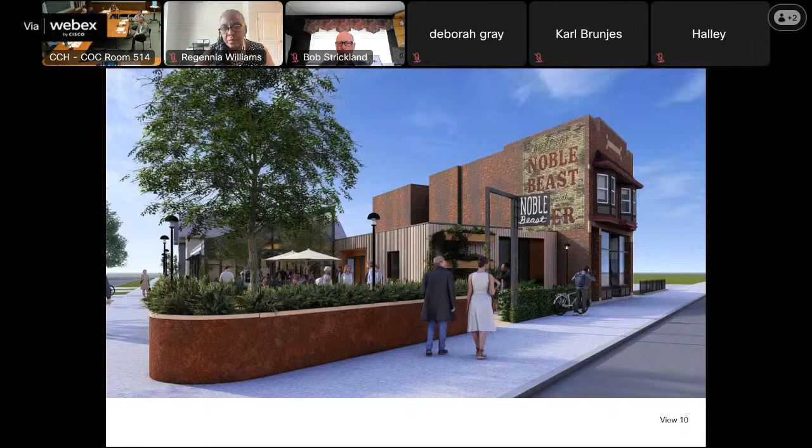Here's a view at sidewalk level from 38th and Lorraine.

And then here's a view looking east on Lorraine, looking at that main entry from the sidewalk.

Basically looking from the north side of Lorraine towards the existing building. We do have the new storefront shown there for views into and out of that space for the restaurant portion. We then have a new paint scheme for the bay windows up above. The white windows would stay, so that's something we'll have to integrate into the overall palette and response to everything. This is somewhat of a unique view where the one-story addition looks like it's in plane with the existing two-story building, but it's essentially set back, I think, 7 or 8 feet relative to that facade. So it is not flush with it from this view.

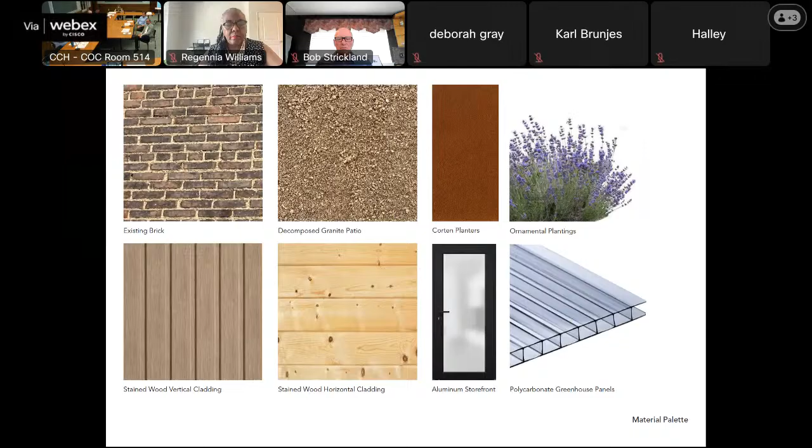I think the idea with the finishes and the plantings and all that is to make it feel like a park, as much like a garden, much like a park as possible. That's what brings families, it brings neighbors. It's a relaxed atmosphere, right? And so that's kind of our vision for this.

From a zoning perspective, this is in a local retail district, so this is an approved use. We're also meeting the criteria of the pedestrian retail overlay district, where we get some extra dimension from the property line for an outdoor cafe. This handout that I gave you shows the dimensions relative to neighbors' houses and basically just an overall view of how it sits relative to the context.

So with that, I'd be happy to hear any questions or comments.

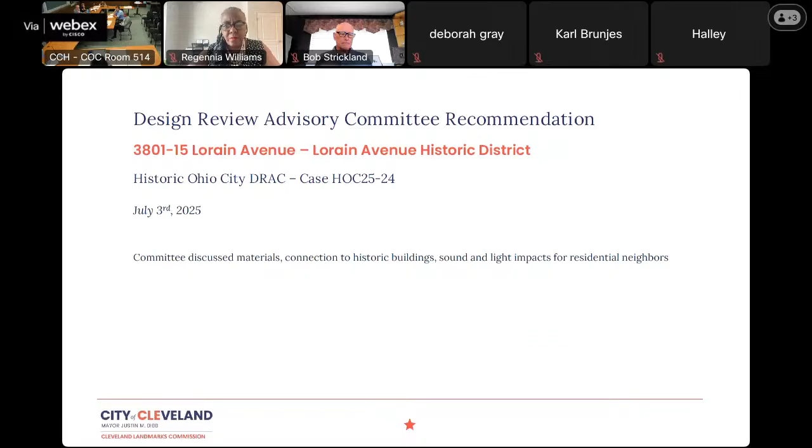Thank you. And then do you want landmark comments or public comments? Public comment, I'll do that.

So we did receive public comment for this project. We received about 96 comments that came in prior to the deadline, with six additional comments coming after the deadline, so those will not be noted here. Of the 90 plus comments we received, 72 of them were in support of the project.

Some of the support comments were fairly general, expressing support for Noble Beast as a business, support for bringing local businesses into the area, using that vacant lot, building momentum for more development along Lorain, and having growth and improvement in the community. Other comments specific to the design mentioned the unique design with the outdoor space, the planting and greenery adding to the street, the unique and interesting greenhouse, and how the site is friendly to multiple forms of transportation on that corner.

We did receive 24 comments that were opposed to the project. These concerns mentioned the impact to residents along 38th, noise control, crowd control questions, off-street parking concerns, and that the proposal was too big for the lot given the amount of people expected. The historic context was not considered, and there would be a negative impact to the quality of life for the direct neighbors. The massing is missing along the Lorain elevation and is not compatible with the commercial or residential district. There were concerns on traffic, site cleanliness, site control, the modern and contemporary design of the new addition in that historic district, and a lot of comments about the need to work with the neighbors, not against them, and to have a block club or public engagement for the project.

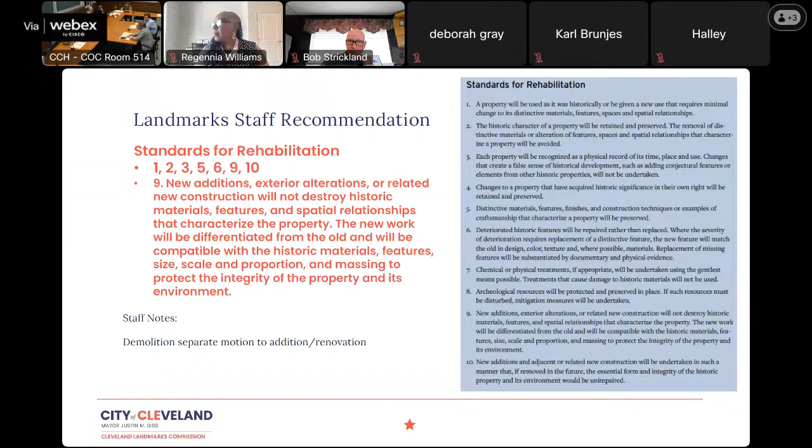The chair stepped out, and her only comment is that the south elevation of the greenhouse should consider solid construction to help insulate from noise for the residential side. That's been an option - we could integrate concrete masonry, maybe a more decorative version than the typical cinder block gray, at least to eye level. That's something we're going to be considering as we go.

Okay, thank you, Mr. Messon. I'll open the table to all questions and comments from the commission. Does anybody have any questions? Mr. Strickland, thank you, Mr. Sandberg.

Operationally, if we could look at the site plan, I wasn't able to note a location for a dumpster. You commented about deliveries coming in through the drive to the west that's actually owned by the neighbor. I would like to see that memorialized, perhaps even a permanent easement that allows for that use on a permanent basis in case the ownership next door changes.

Okay, so you do have dumpsters identified on our property. And there is a bit of a setback relative to the existing structure, Mr. Strickland. So we'll see what we could do in terms of the easement, but we do have some space there that the dumpsters could be dragged to for maintenance.

Right, yeah, just logistically, that obviously needs to be worked out. Given what I anticipate to be a highly successful project, there's going to be considerable waste generated, so that really needs to be worked out.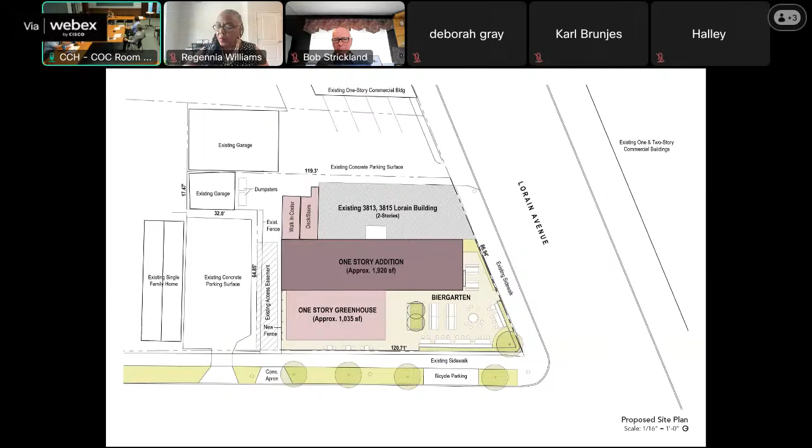Are we discussing the exterior of the existing building that's going to be retained? Okay, I noticed on the information that we received as the commission that there are two exterior doors, the one in the center of the storefront and the one to the left, and they are attractive, historic looking doors. One has the oval glass and the other is kind of a craftsman style, on 3815. I strongly would like to see those retained. Sure, yeah, the one on the left goes directly to the upstairs. So that's staying. I don't have any designs on replacing that.

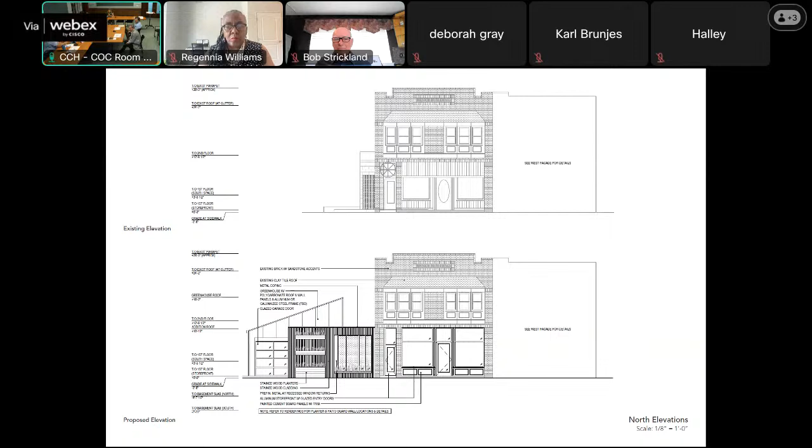Unless, can we go back to the context photos? Maybe that first one that shows that primary facade. You can't really see the doors in that one, and that serves the upper front unit. It has sort of a craftsman style, the lights divided in kind of a craftsman style on the door on the left. The other one has the oval window. It used to be Nick's and now it's Proof, I think - they retained the door. Yeah, they retained that, I think it was a very similar door that they retained.

It's hard to see now because a lot of the stonework has been darkened with time and pollution, but incorporating some of those stone colors into the wood would probably enhance the building.

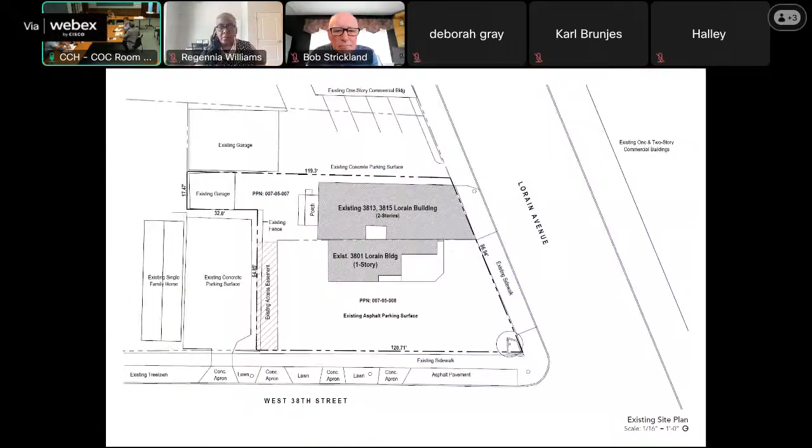I want to see complete engagement with the neighbors by the city as well as the applicant. I think their concerns are legitimate and they need to be addressed and responded to. I agree with staff in that orienting the new construction portion towards the south and the east of the vacant parcel might help mitigate noise and congestion issues. It's the new construction that's going alongside the existing building, the green rectangle. And that was also the staff's recommendation, and I'm in agreement with that.

We can explore that. I think a lot of it has to do with the functionality of how these two buildings connect and how they lay out, but it's something we can explore. Maybe just setting it back would also be helpful. I think you activate Lorain, which is what you really want to activate, as opposed to West 38th. I think it would mitigate the design differences between this very contemporary new building and the contributing existing building by setting it back farther, and then you can have more greenery and whatnot up in the front.

But again, I cannot emphasize more that the neighbors have to be on board with this. Yeah, absolutely, and we're happy to go through that process. We just thought we needed to come here first. Excellent. And we can make those changes as well. Right, yeah, we need to hear your guys' feedback in order to make legitimate changes for these things.

We could study that. I'd have to talk to Noble Beast on how it lays out, the flow between those two buildings. It's important for them to have an operation which can run throughout the year as well, right?

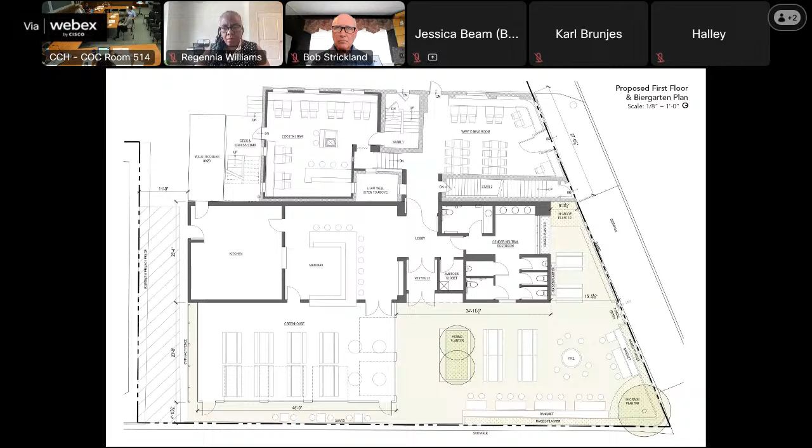Any other questions? One quick question. On the original building and the entrance going to the units, the apartments upstairs, there's that wrought iron element, and I noticed that it's not retained. That was an oversight on our part. Okay, so yeah, it makes the building stand out.

Very nice. I think I have an old photo of this building that if I can dig up, I can share with you guys, because we talked to a previous owner about going through storefront renovation programs. So I recall doing some research because that was one of those questions, like how old is that thing, has it been there long, or is it added in the 70s or what? But I can try and dig that up.

Yeah, I'd love to have it. I reached out to CPL, they didn't have anything in their photograph collection.

Any other commission comments, questions? I guess I'll give some input. I do agree with staff's recommendation.

Maybe look at moving the bathrooms and the greenhouse rotating. Is the greenhouse going to be a 3-season space? 4-season. It would be conditioned in a way that kind of takes the edge off, where in the wintertime you'd still probably want your coat if you're sitting outside. Like Jukebox has that sort of permanent tent in the winter, which they heat. They use like a blower fan, basically. But you can sit out there in the winter. It's a little chilly, but it's not bad. Okay, this would be a radiant heat.

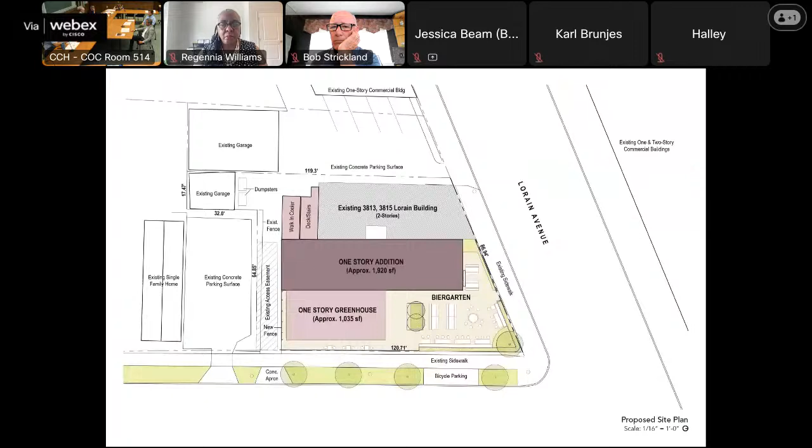Interestingly, they are also thinking about offering breakfast sandwiches in the mornings and on the weekends. So I think with them living in the neighborhood, they kind of have a pulse on what they appreciate from a service perspective. It's called Lorain Beer Garden by Noble Beast, and it's a full day place, right? But it wouldn't be staying open past midnight or anything like that. So their hours are still to be determined.

And as far as the historic building, I think what you have designed for the storefront is great. I really like it. I like that it's bringing back what was likely there. It's very sympathetic to the historic building, and I think it's a great design. Thanks.

Yes, thanks Mr. Chair. I'm also fully in support of this concept. I'm also a longtime Ohio City resident, and I'm really excited that Lorain is starting to become activated. Not partner, but sort of like looking at West 25th and how that's gotten so much development built up over the years. I'm really excited to see this happening on Lorain, and I agree. That's why I wanted it there.